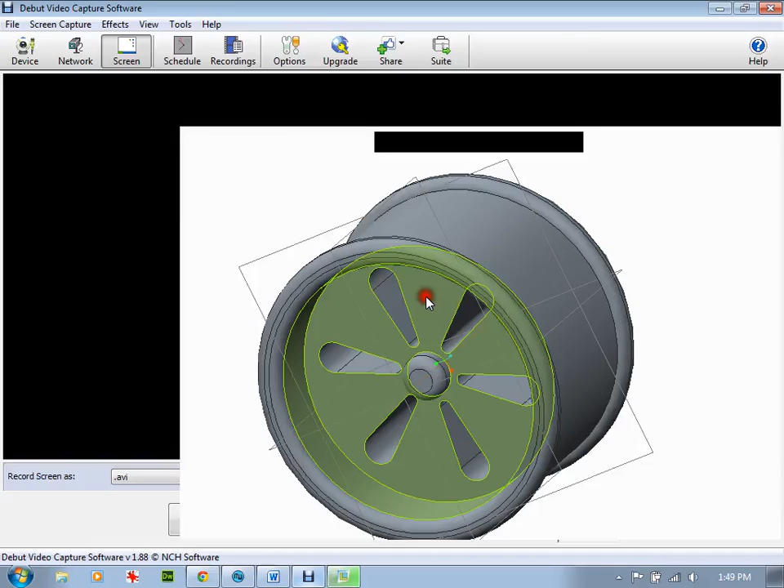Welcome back. So we finished off with a rim, and that's what our end result looks like. Now what we're going to do is go on and start building some other parts.

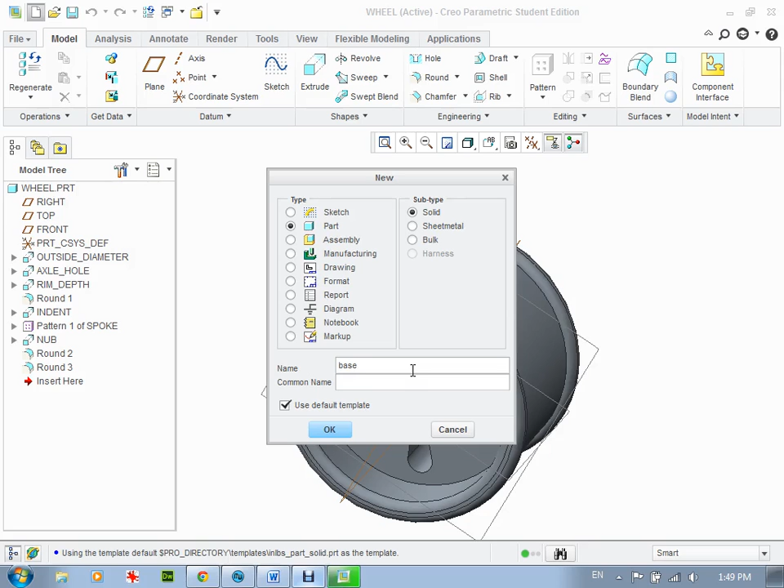The next part we're going to build is the chassis, or the base. I'm going to go up to File, either New here or File, and select New, making sure it's a part, not a sketch. I'm going to call this one the base, or let's call it Sumo base. Click OK, and my new interface starts. Now make sure you've maximized it, because otherwise some of the icons and things won't show up the same as in this tutorial.

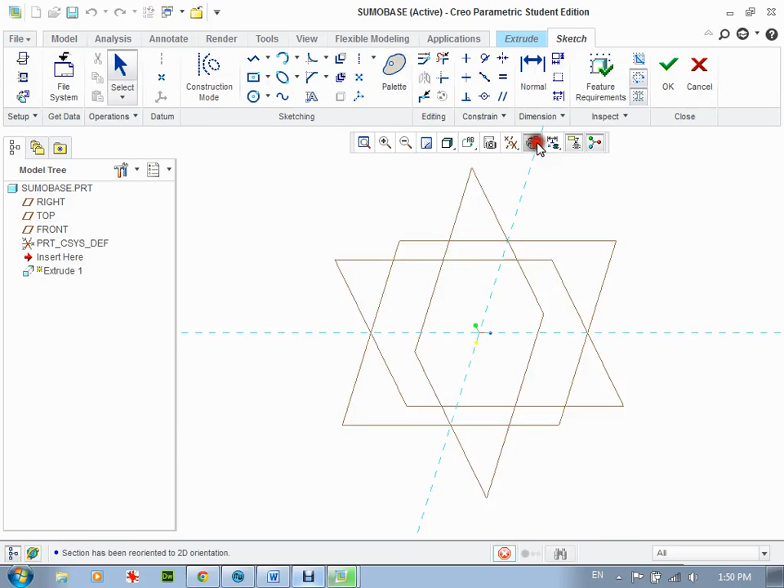So, very basic start. From the top view, go to extrude. I'm going to go into sketch view, so it's 2D, and make sure it's a center rectangle. When I click on the arrow, there are different types of rectangles, and I want the center rectangle. I'm going to make one that's a rectangle, not a square.

I'm going to make this 3 inches, and I'd suggest you follow these numbers, and 4.75. These numbers make sure your SumoBot actually fits within the 13 by 13 square that you're allowed. So 5.1 is about 13 centimeters, so 4.75 is a little bit smaller. You can always modify this later. I'll click OK.

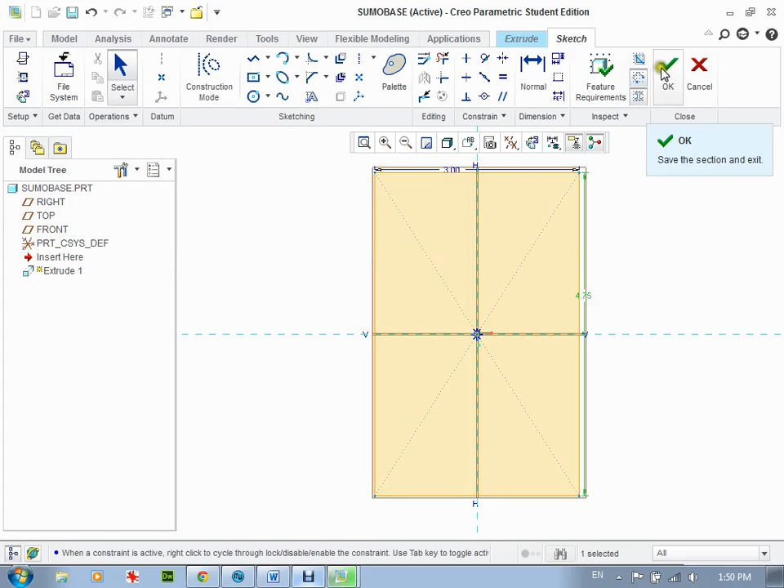For thickness, depending on if you're 3D printing it or laser engraving it, if you're 3D printing it, I'm going to leave it as 0.1. If you use a laser engraver, it doesn't matter. That's about thick enough, which is 1/10 of an inch. I'll click OK, and there's my base.

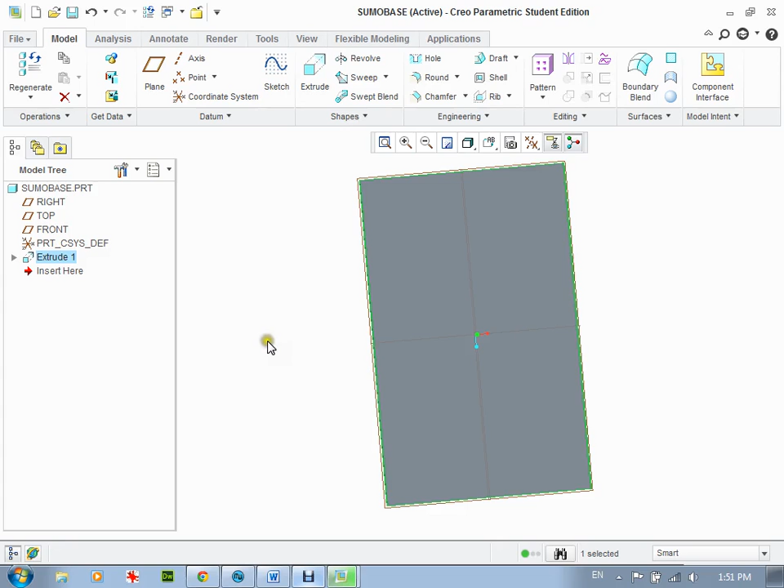Starts off pretty simple. I'm going to add some holes to it now for where the gearbox goes and to actually hold the top to it later. To start off with, I'm going to click on the surface, which goes dark green, then extrude as usual, and go back to sketch view.

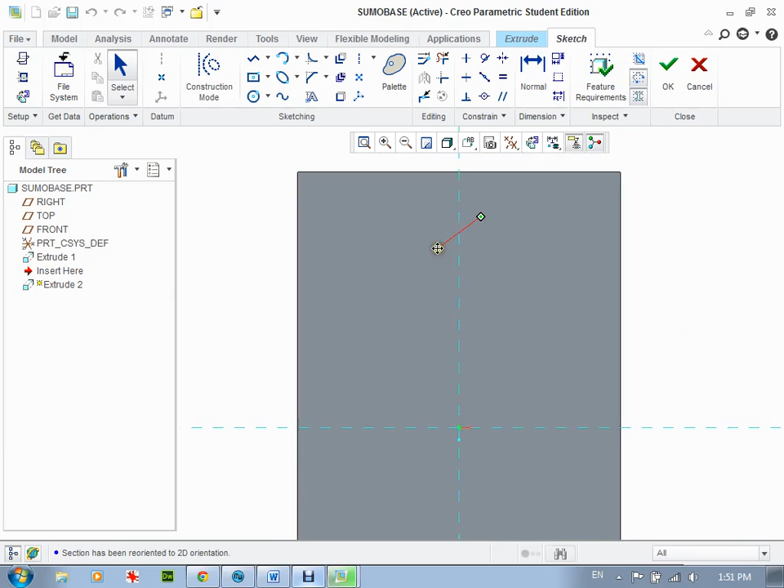In here now I'm laid up, and I'm going to put two holes down here basically for the gearbox to go. I'm going to scroll in a bit so you can see what I'm doing. Hold the shift key down, hold the center mouse button down, and move it so it's a little bit bigger. I'm going to grab a circle and pick randomly where I want it, clicking right about there, then OK.

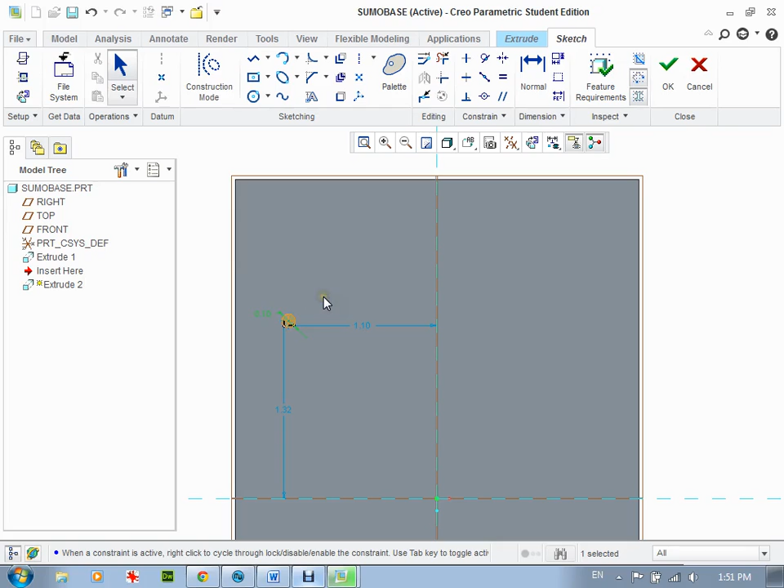Now I want to make some specific distances and sizes here. If I double click on this one, I want the hole to be 0.1. What I also want is the distance from the center of the part to the center of the hole, which I know is supposed to be 1.15. So that's the gearbox.

Then the other one, you see how it goes kind of from the center up - I'm going to change that dimension. I'll go to normal dimensions, click from the top here to the center right there, and with the scroll button I'm going to change that to, let's leave it at 1 inch and see what happens. We'll put that there, and click OK.

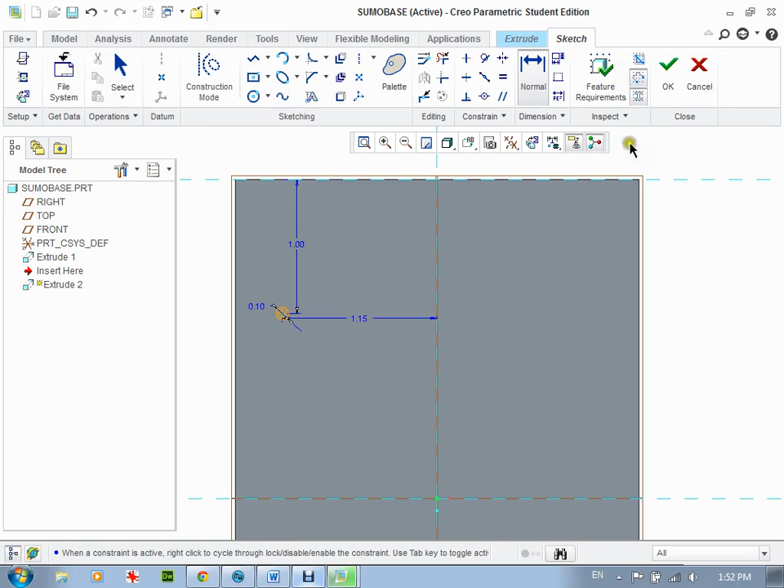So right now I'm going to click select. Now I've got that one hole there. What I want to do is mirror it again, just like before. I'll click on the center line, put a center line there, select and highlight it, go to mirror across the center line, and there we go.

Now what happens is R1, R1 - you see they're the same. So if I were to change the diameter of this one to, let's say, 0.2, it automatically changes the diameter of that one over there. I'm going to go back to 0.1 because that's what I know I want. Click OK, and you can see that they go out.

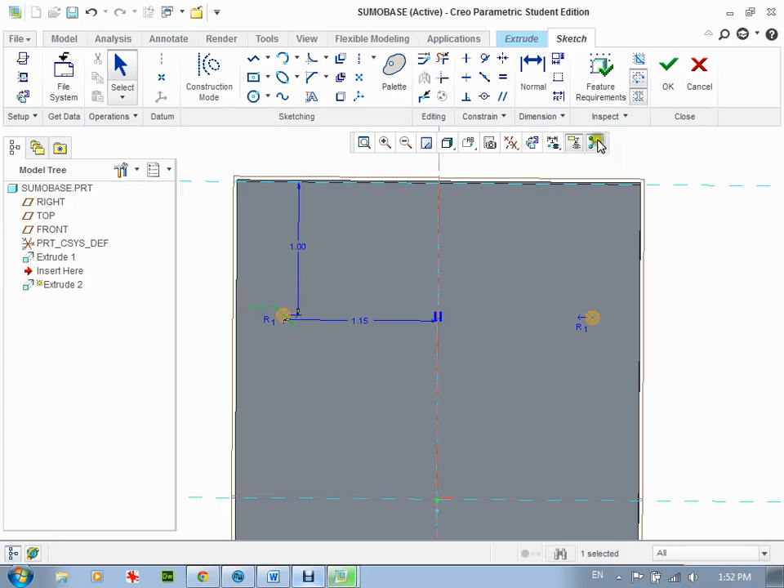So I'm going to go through and reverse direction to remove material. And there we go, there's my 2 holes. Those are for the gearbox to screw down onto.

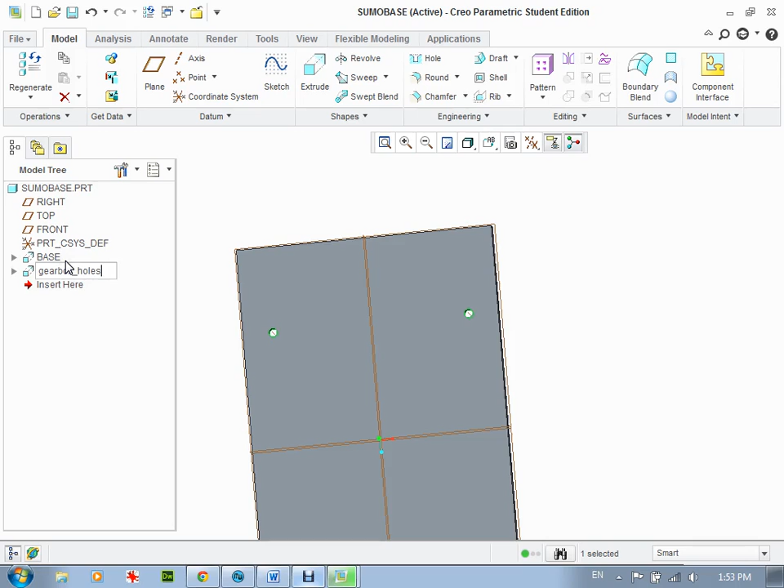Now over here on the model tree I want to change my name, so I'm going to call that base, and I'm going to call this one gearbox holes.

Now what I'm going to do is put 2 more holes up here, and down the center, to hold the chassis eventually against the enclosure or the body you're going to put on. So I'll add 2 more holes by clicking on it again and extruding.

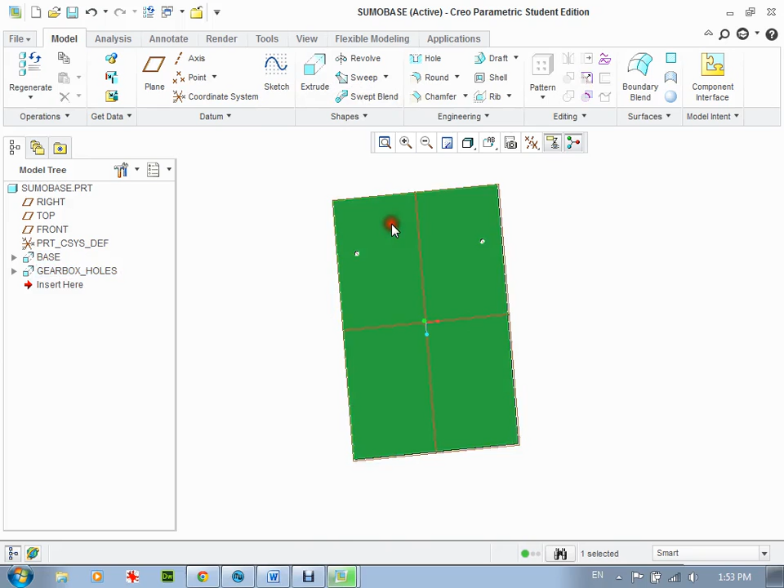I'm going to do a sketch view, zoom into it, and put a hole up here. Again I'm going to do 1. There's my hole, and I know that for the screws we're going to use, it's going to be 0.15.

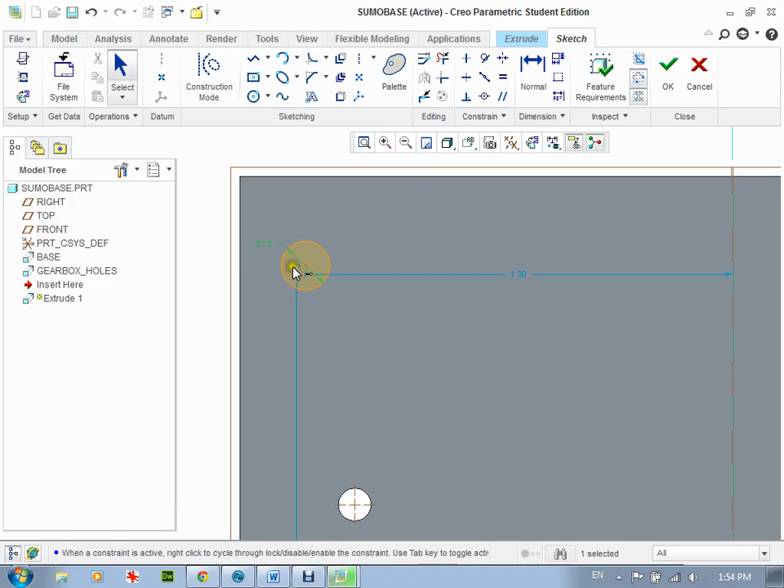Now I'm going to move it from this edge and this edge. I go normal dimension, from the center to here, and I want that to be 0.2, and from the center to this side I want that to be 0.2 as well.

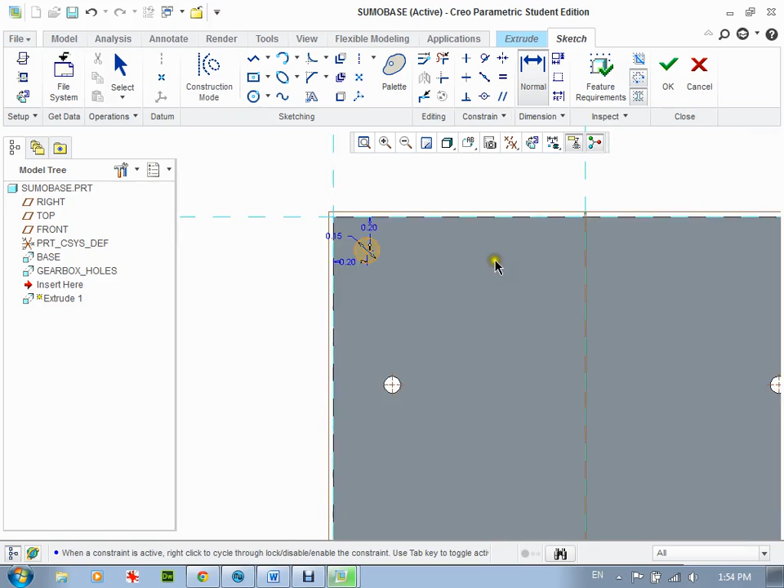So that's where the hole is going to go, and once again I'm going to mirror it so I get the right spot. Select the center line first, grab it, put it down, then select it, highlight it, and mirror it to that.

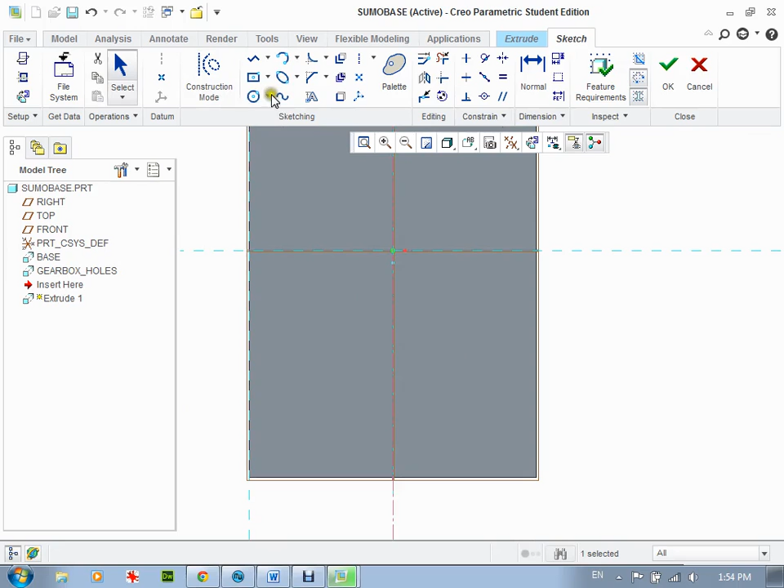The last one I'm going to do is put another hole down the center. You can put 2 holes to actually hold the body on, but I'm only going to put 1, so I'm going to add 1 more hole here.

Now if I go, you can see it select R. Let me zoom in a bit here. As I go, you'll see it go to R right away, which means the radius is matching the ones from above. So I'm going to do that hole there so it matches those 2 right away.

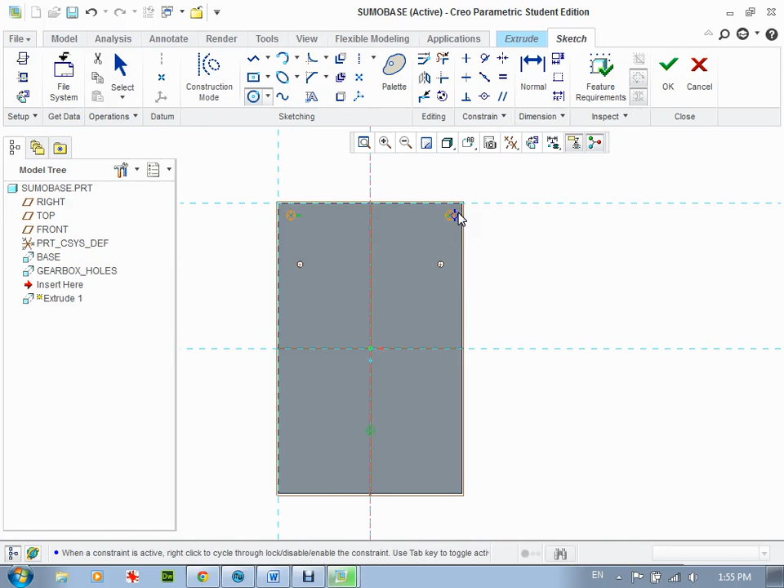For this example, I want the distance from the center of this hole to this upper edge to be 1.40. Just follow this, you can always change it later on. I'm going to click OK, and once again there are the holes.

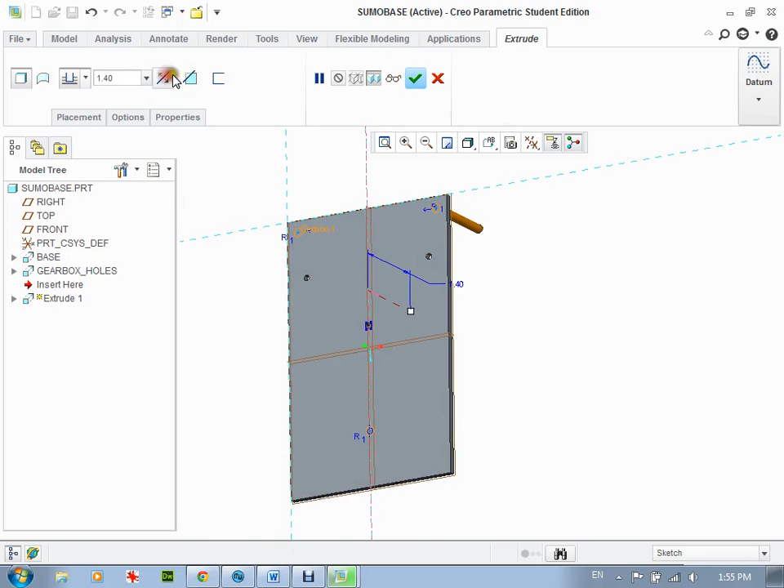So I'm going to reverse the direction, go through all, and remove the material. OK, so there's the base almost complete. The only thing is your chassis might end up with rounded edges over.

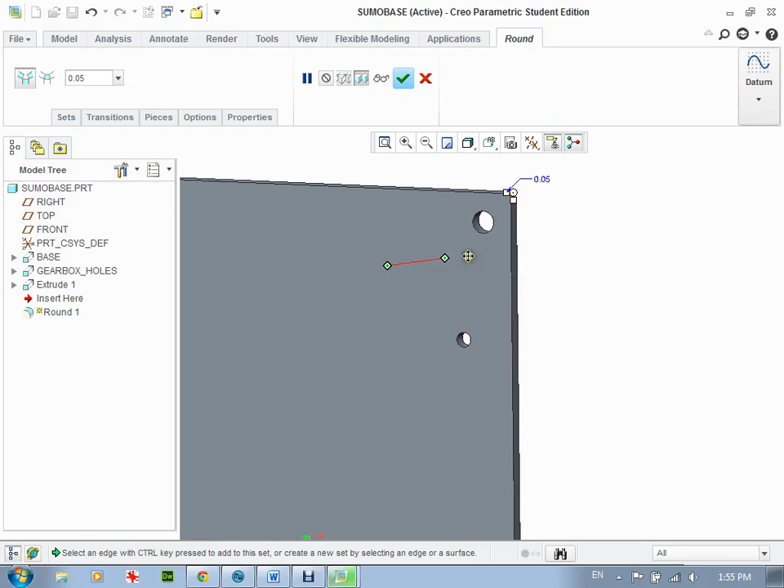So what I'm going to do right now is round each one of these edges over. I'm going to click on round, grab this edge right there, move over to here, and hold the shift or control key down and grab that edge too.

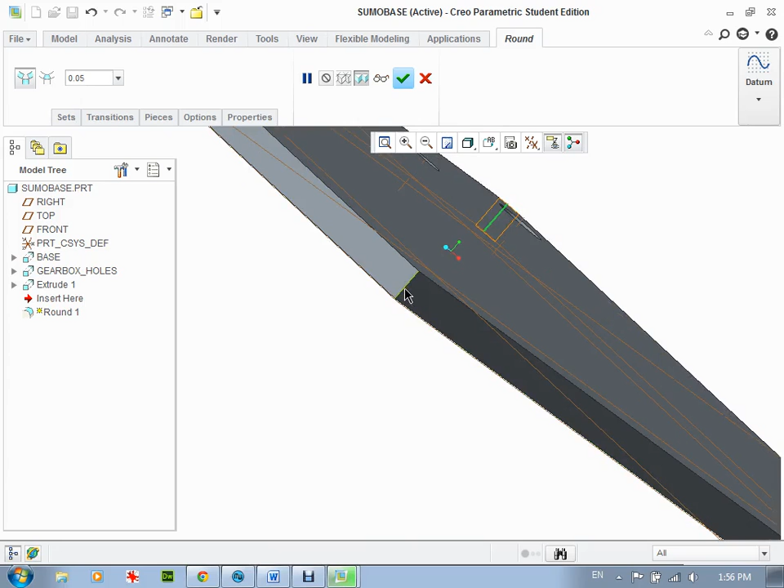Now I'm going to scroll around and zoom in, hold the control key down, grab that edge so they're all going based on that same size. Then scroll to this one and grab that edge there, also holding control. Now I've selected all 4 at the same time.

What I'm going to do now is set this number to, let's say, 0.25, a quarter of an inch. And you can see how I've rounded them all.

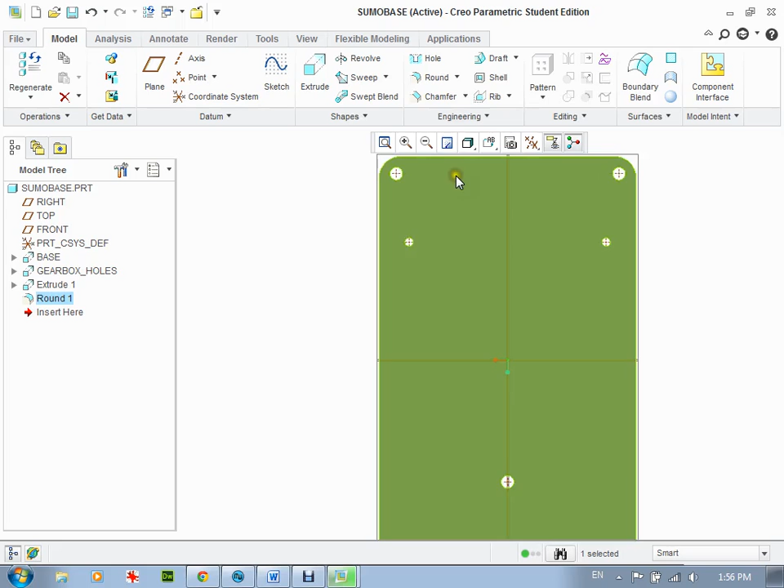I'm going to click OK, and do a bottom view this time. So that's what it looks like in my finished product. I can go like that, and that's the base.

Eventually, in the next section, you're going to put the gearbox onto here and then assemble your wheels onto this. So there's actually no more building until the gearbox is done. We'll stop right here for now.